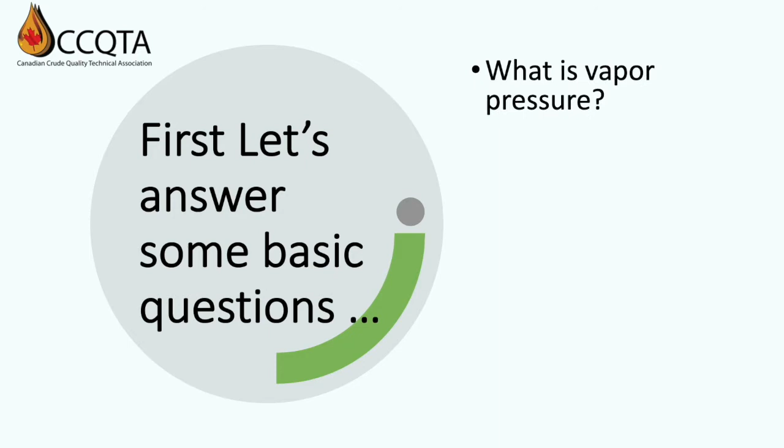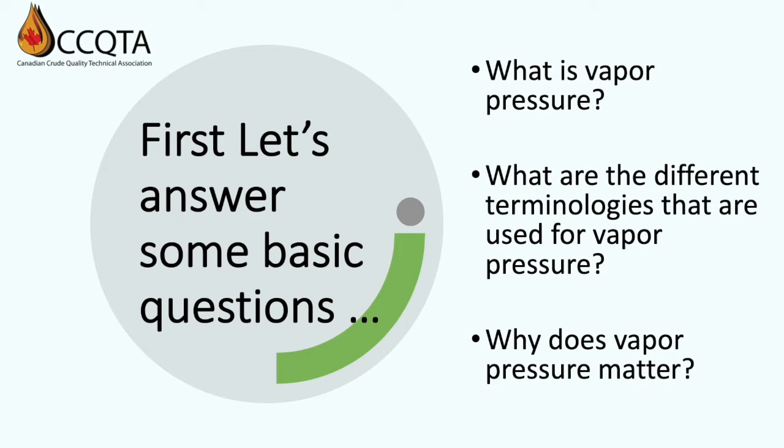First, let's answer some basic questions. What is vapor pressure? What are the terminologies that are used for vapor pressure? And why does vapor pressure matter? Now, some of this may appear a little basic. However, it's important to make sure we're all on the same level before we get too far into this topic. So let's start with what is vapor pressure.

The encyclopedia definition is: vapor pressure is a measure of the tendency of a material to change into the gaseous or vapor state, and it increases with temperature. The temperature at which the vapor pressure at the surface of a liquid becomes equal to the pressure exerted by the surroundings is called the boiling point of the liquid.

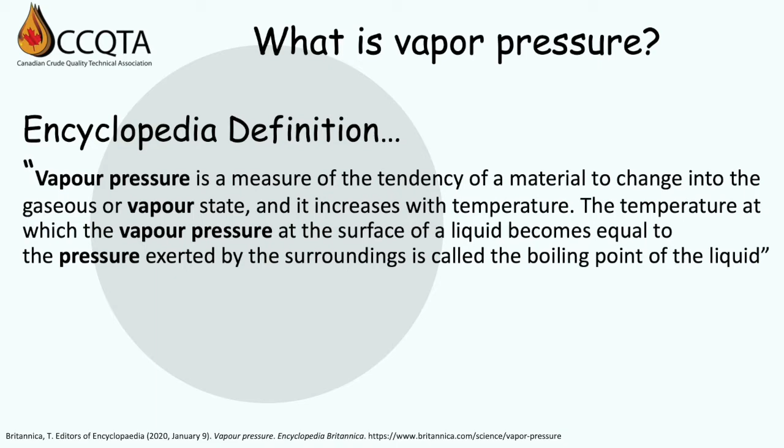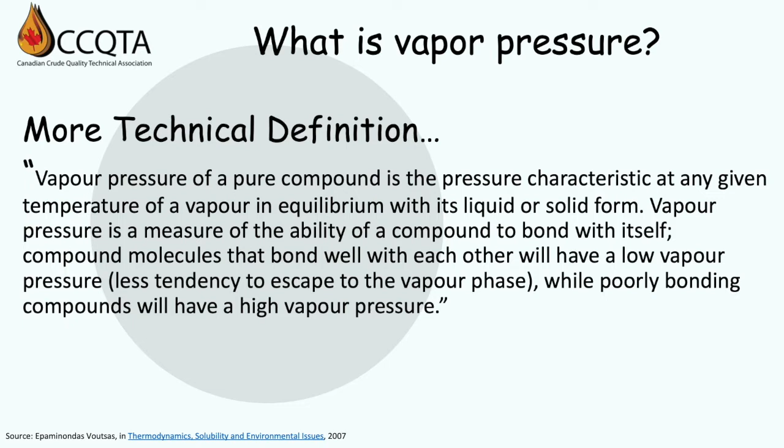Now, to get a little more technical, the vapor pressure of a pure compound is the pressure characteristic at any given temperature of a vapor in equilibrium with its liquid or solid form. Vapor pressure is a measure of the ability of a compound to bond with itself. Compound molecules that tend to bond well with each other have a low vapor pressure, meaning less tendency to escape into the vapor phase, while poorly bonding compounds will have a higher vapor pressure, meaning a greater tendency to escape into the vapor phase.

Now, to get even more technical, from a thermodynamic standpoint, this can be viewed from the well-known Clausius-Clapeyron expression, where delta H is the heat of vaporization. So in explanation, the energy needed to break intermolecular bonds in the pure condensed liquid. Since breaking bonds requires the input of energy, we would expect the vapor pressure of a compound to increase with increasing temperature.

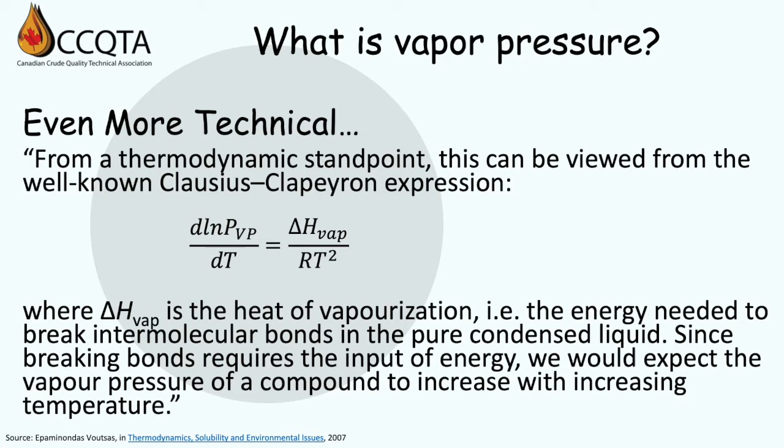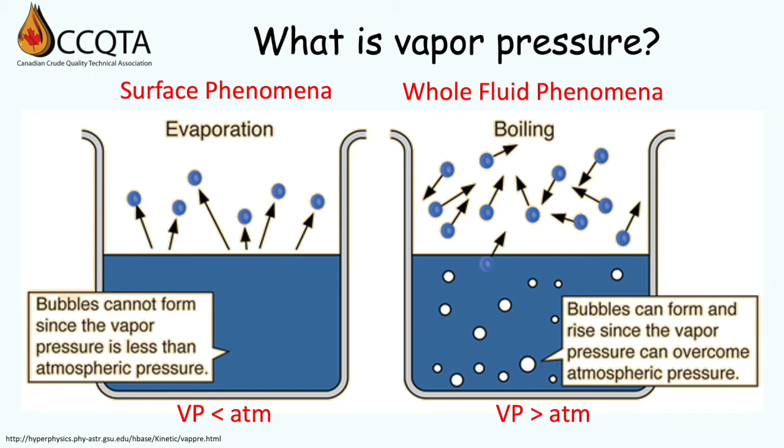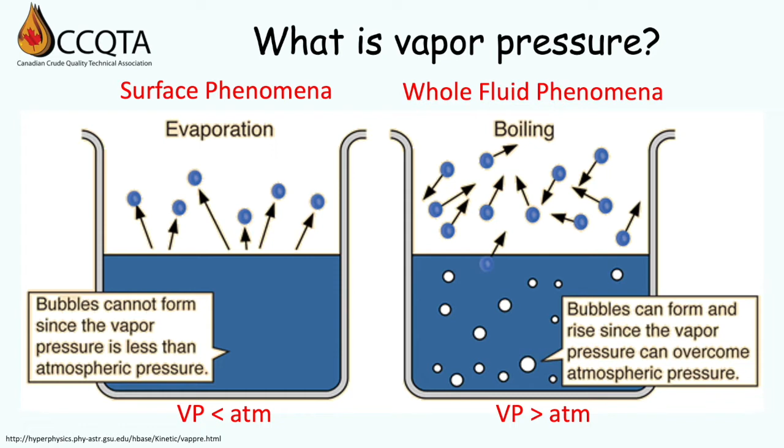So how does vapor pressure relate to evaporation and boiling? An important distinction between evaporation and boiling is that evaporation is a surface phenomenon, while boiling is a whole fluid phenomenon. When the vapor pressure is below atmospheric pressure, evaporation takes place because atmospheric pressure is pushing on the surface, preventing bubbles from forming. When the vapor pressure is above atmospheric pressure, boiling takes place throughout the fluid because bubbles can form. Keep in mind, even ice has a vapor pressure, which is why ice cubes left in the freezer shrink over time.

There is also a difference between an open and closed system. In an open system, the vapor pressure allows molecules from the surface to evaporate and enter the vapor space above the liquid. However, these molecules can escape, so equilibrium cannot be established. Therefore, evaporation continues. On the other hand, in a closed system, such as a sealed tank or cylinder, evaporation also occurs. However, the molecules can't escape, so they reach an equilibrium where an equal number of molecules evaporate as do condense. A floating roof tank would be a hybrid of these two, where it is a closed system. However, there are small losses that occur around seals, fittings, etc.

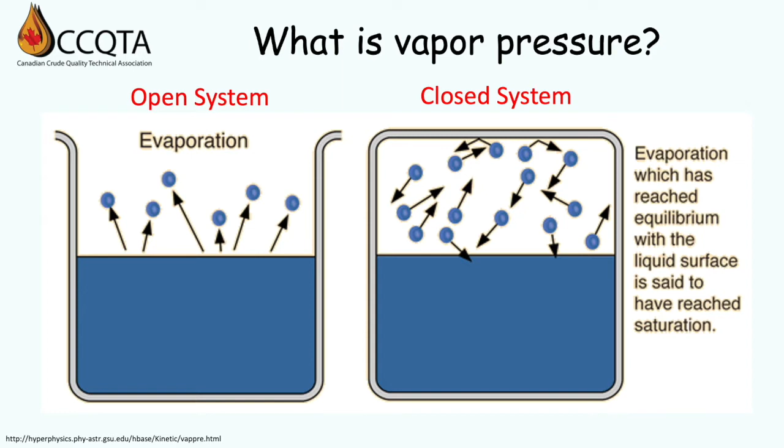How about for a complex mixture like crude oils? Let's look at this in practical terms. Crude oil has hundreds to thousands of individual components with widely varying characteristics. However, only the smallest components have appreciable vapor pressures. This is because the smaller the molecule, the lower the intermolecular forces, so they don't want to hang around together.

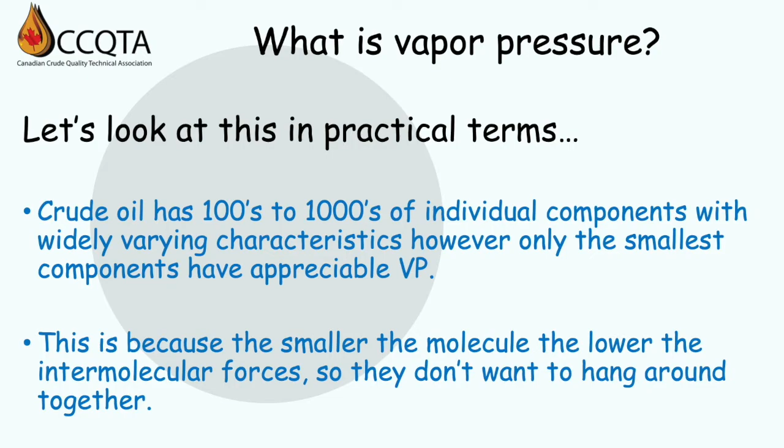Now let's look at the vapor pressure of these components as a function of their size. On the y-axis, we have the molecular volume or size, and on the x-axis, the carbon number from carbon-1 methane through carbon-6 hexane. The size of the bubble represents the vapor pressure contribution of each component. For example, C6 has the largest molecular volume, but the smallest vapor pressure at 40 kPa. Conversely, C1, methane, has the smallest molecular volume, but has the largest vapor pressure at a whopping 35,000 kPa. Let's look at why this is.

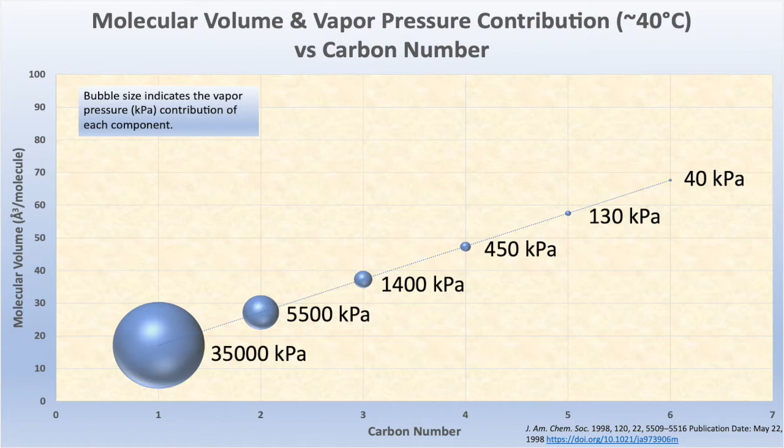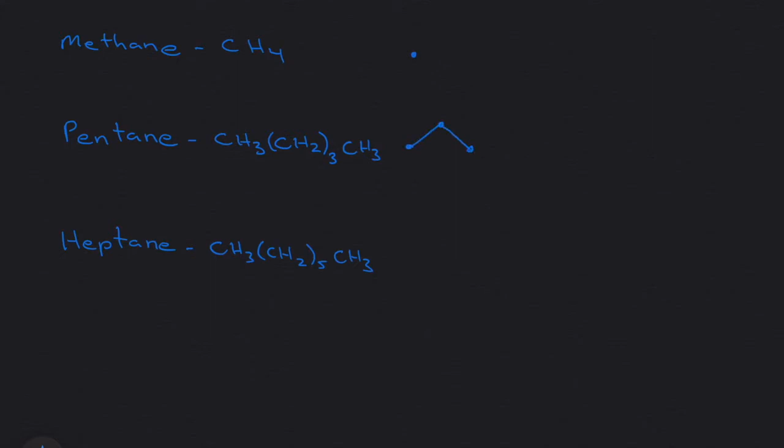Let's look at methane, pentane, and heptane, and how they interact with themselves. These ball and stick diagrams depict the individual carbons and the bonds between them, with hydrogens assumed on each carbon. There are 3 isomers of pentane and 9 isomers of heptane, which are different configurations using the same number of carbons.

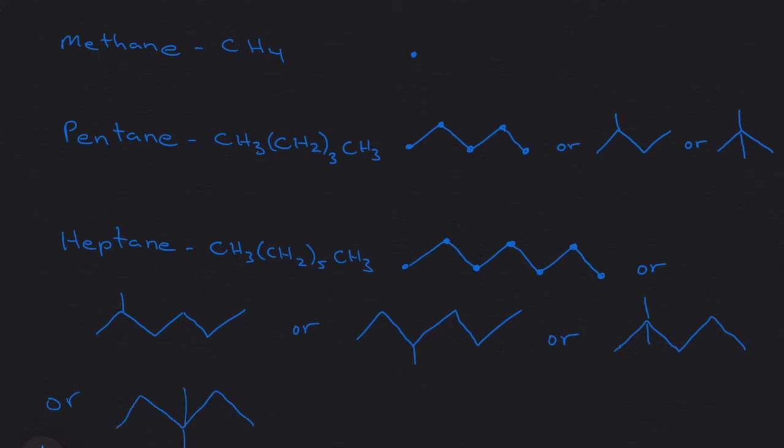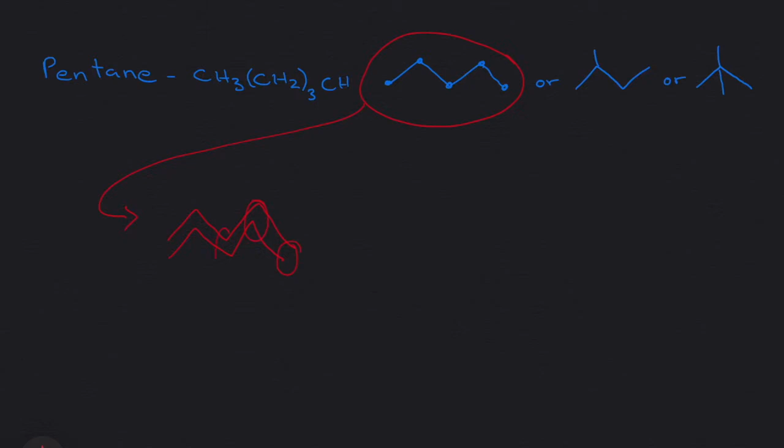Let's compare how pentane isomers react with each other. N-pentane is basically a straight chain. Stacked on top of one another, they can get quite close, allowing their hydrogens to interact, resulting in hydrogen bonding. In this case, they have 5 points of close interaction. If we take isopentane, the methyl group sticking up from carbon 2 restricts how close the other atoms can get to one another, meaning the intermolecular bonding will be far less than that for N-pentane.

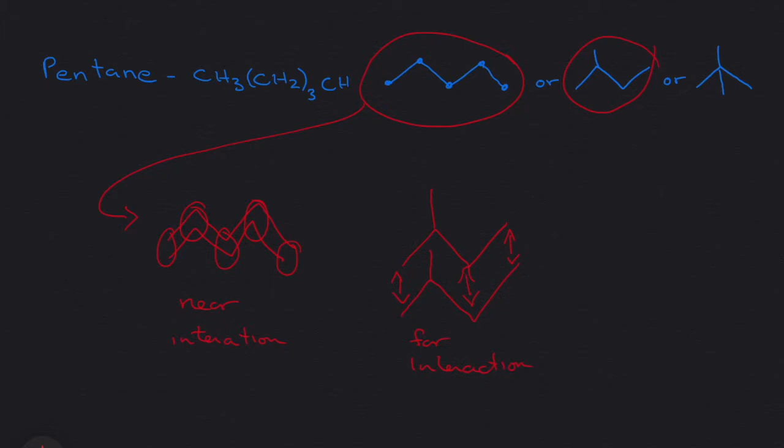Now let's take a look at heptane. We'll only look at two isomers. N-heptane is very similar to N-pentane in that it's a straight chain, and it has up to 7 areas of potential interaction. This branched chain version interacts similar to isopentane, except it has multiple branches, so it can't get close enough geometrically to allow close interaction.

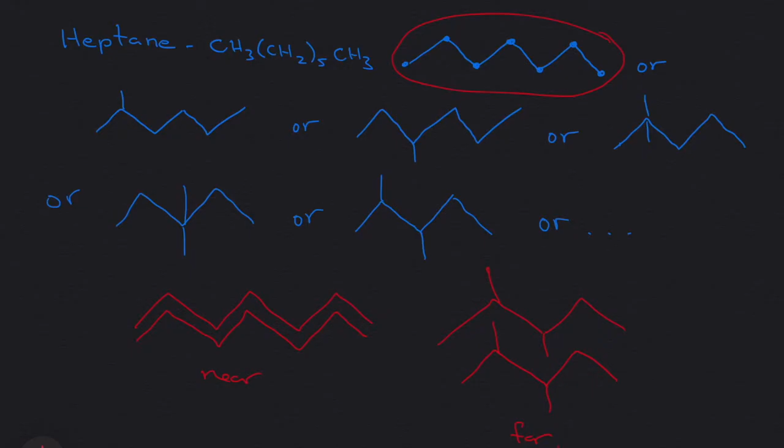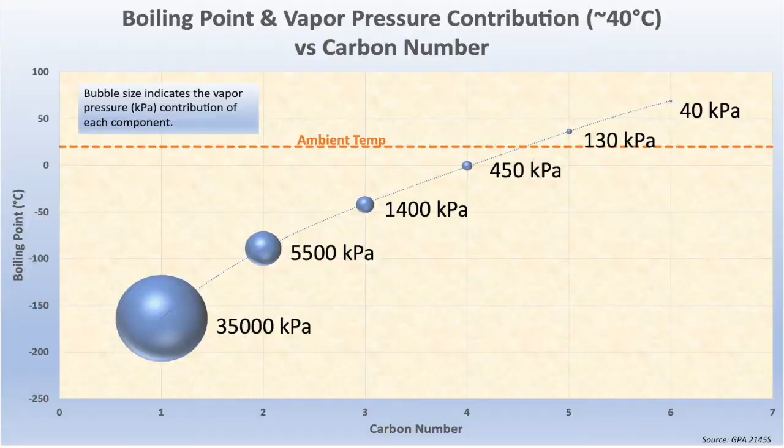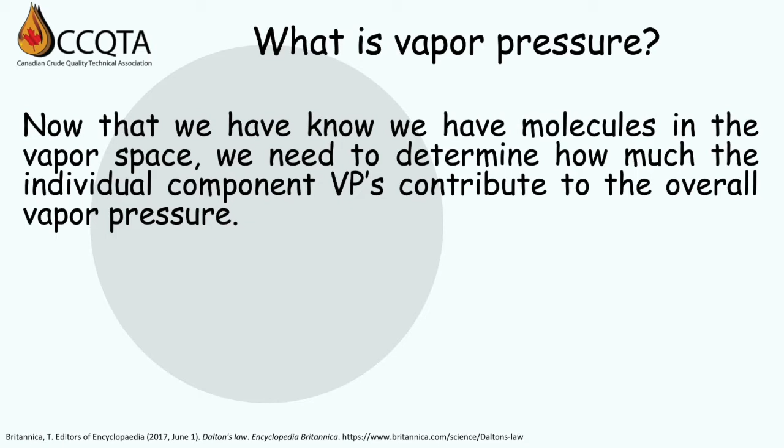Now that we know we have molecules in the vapor space, we need to determine how much the individual component vapor pressures contribute to the overall vapor pressure. In steps Dalton's law of partial pressures, which states the total pressure of a mixture of gases is equal to the sum of the partial pressures of the individual component gases. The partial pressure is the pressure that each gas would exert if it alone occupied the volume of the mixture at the same temperature.

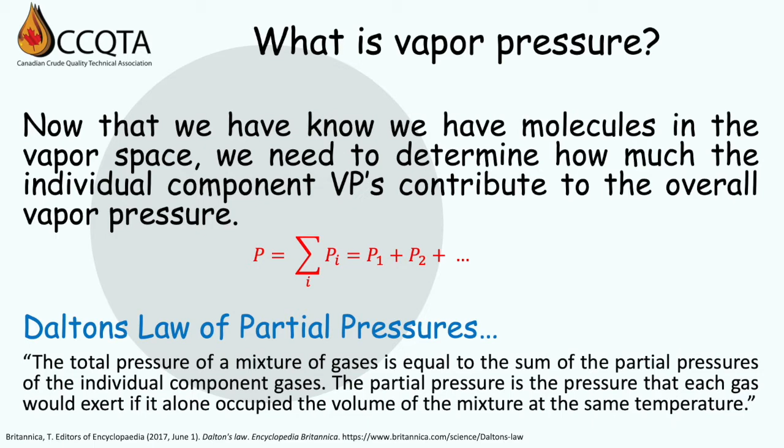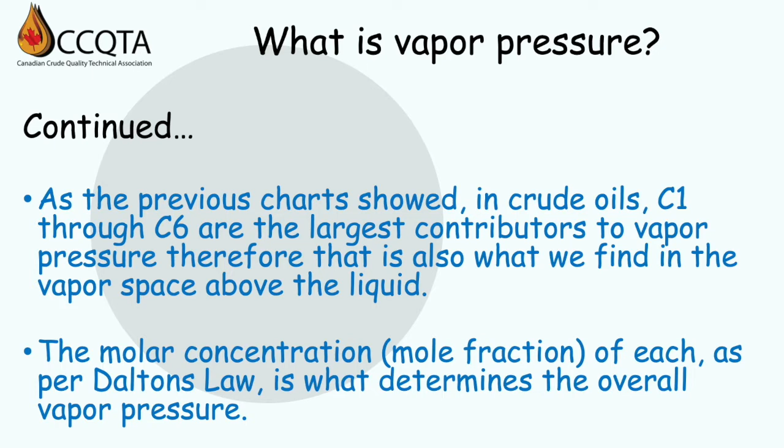As the previous chart showed, in crude oils, C1 through C6 are the largest contributors to vapor pressure. Therefore, this is also what we find in the vapor space above the liquid. The molar concentration or mole fraction of each, as per Dalton's law, is what determines the overall vapor pressure.

Let's look at a real example of a crude oil. On the right, you can see that C1 through C10 make up about 24% of the total mass of the sample. Let's look at the impact of this on the vapor pressure.

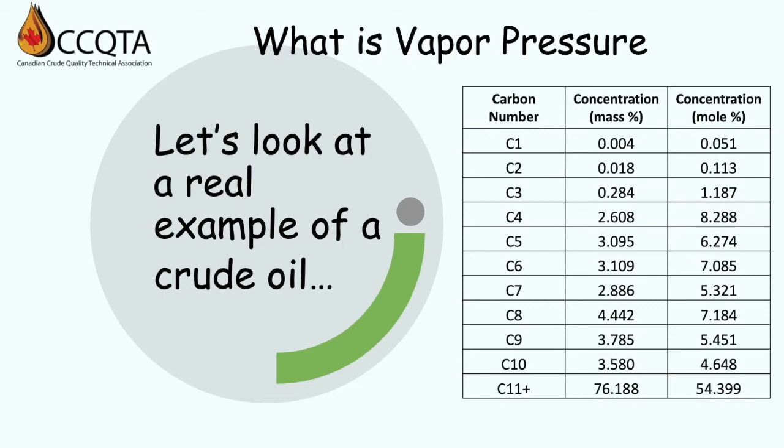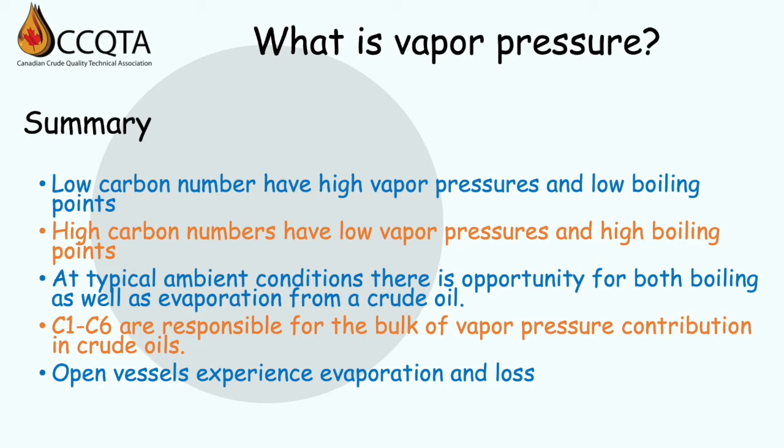Let's summarize what we've learned so far. Low carbon numbers have high vapor pressures and low boiling points. High carbon numbers have low vapor pressures and high boiling points. At typical ambient conditions, there's an opportunity for both boiling as well as evaporation from a crude oil. C1 through C6 are responsible for the bulk of vapor pressure contribution in crude oils. Open vessels experience evaporation and loss, and finally, closed vessels experience no evaporation and loss, except in the case of a floating roof tank, which is a bit of a hybrid, as we've discussed already.

Now let's move on to vapor pressure terminology.

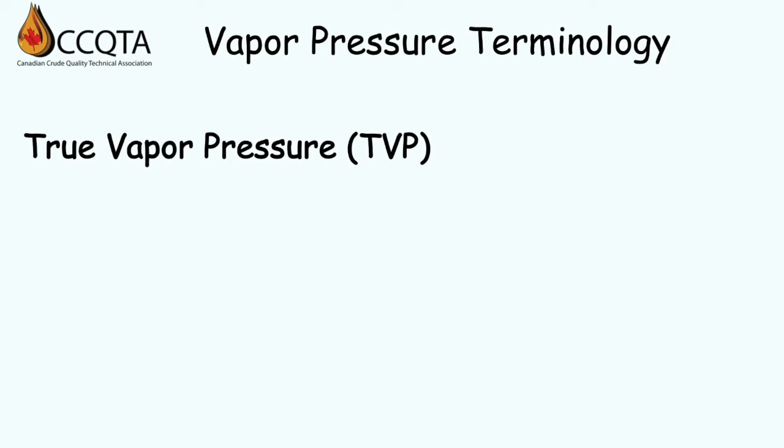The most commonly used terminologies are true vapor pressure (TVP), total vapor pressure (also TVP), and lastly, Reid vapor pressure (RVP). Why are there so many? Let's look at how vapor pressure is defined throughout the industry.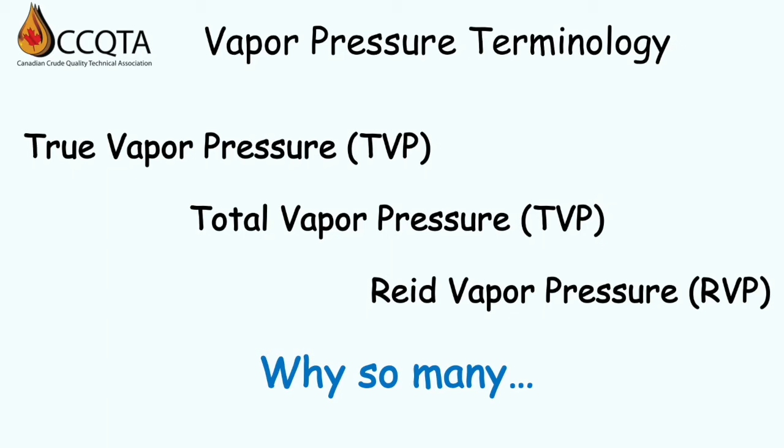ASTM D4175 is the terminology standard for the ASTM D02 Committee on Petroleum Products, Liquid Fuels, and Lubricants, and it attempts to gather and standardize definitions between all the various associated standards. Looking at these four: the first is vapor pressure generically, the pressure exerted by the vapor of a liquid in equilibrium with the liquid. Total vapor pressure is the observed pressure measured in the experiment, that is the sum of the partial pressure of the sample and the partial pressure of the dissolved air.

True vapor pressure here is the pressure at which the fluid is in equilibrium between its liquid and gas state. And the last one, vapor pressure of crude oil, VPCRX, is the pressure exerted in an evacuated chamber at a vapor liquid ratio of X to 1 by conditioned or unconditioned crude oil, which may contain gas, air, or water, or a combination thereof, where X may vary from 4 to 0.02.

Now, while not incorrect, the TVP definition here is open for interpretation because it does not specify the vapor-to-liquid ratio. As we saw in previous definitions, the TVP is where the vapor-liquid ratio is 0 to 1. ASTM D4057 is a sampling practice, so it should be more clear on the definition, so it would be better if they clarified that further.

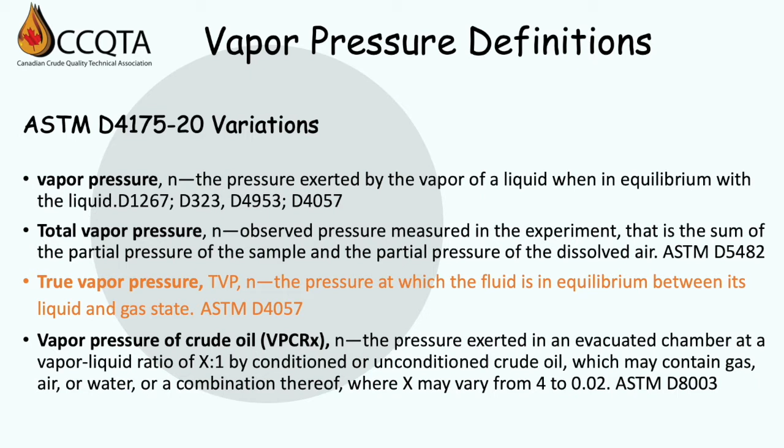The Reid vapor pressure, or RVP, is well known since it was first published back in the 1930s. It states the resultant total pressure reading, corrected for measuring error, of a specific empirical test method, ASTM D323, for measuring the vapor pressure of gasoline and other volatile products. The equilibrium pressure exerted by an air-saturated fluid at a 4 to 1 vapor-liquid ratio at 37.8 degrees Celsius.

Notice the scope of the definition here: gasoline and other volatile products. The standard was intended for finished product and mostly for fuels that may experience vapor lock in carbureted engines. The VL of 4 to 1 was used so that air saturation of a sample stored in an open container would not impact the overall vapor pressure measurement.

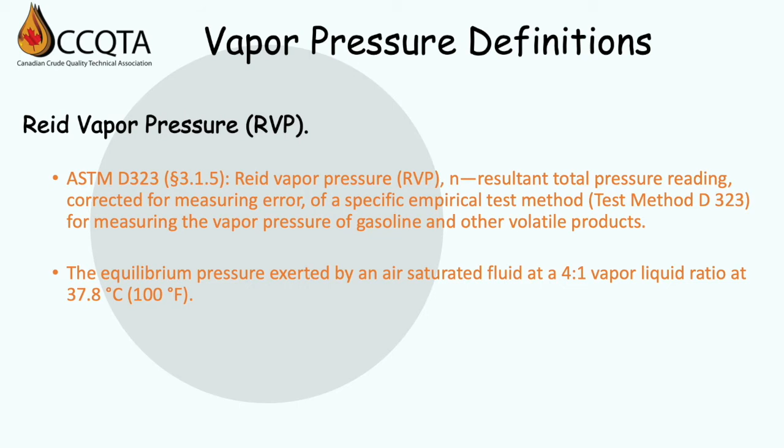Let's look at the true vapor pressure as the US EPA defines it, as per EPA AP-42 Chapter 7. It states true vapor pressure is defined in various ways for different purposes within the industry, such as bubble point for transportation specifications, but for the purposes of these emissions estimating methodologies, it is the sum of the equilibrium partial pressures exerted by the components of a volatile organic liquid using Raoult's law.

True vapor pressure may be determined by ASTM D2879 or D6377 for crude oils with a true vapor pressure greater than 3.6 psia, or obtained from standard reference texts. For certain petroleum liquids, true vapor pressure may be predicted from Reid vapor pressure, which is the absolute vapor pressure of volatile crude oil and volatile non-viscous petroleum liquids, as determined by ASTM D323 or 5191.

Note the use of absolute vapor pressure here, which serves to further confuse the issue. From the text, it sounds like it would be equivalent to true vapor pressure as we've discussed. However, it is actually the same as RVP, which is air saturated at 4 to 1 VL. This definition of RVP is also not consistent with D323 itself.

EPA also indicates that D2879 or D6377 can be used. However, the VL ratio of 2879 is 0.4 to 1, so a 40% ullage, and the statement does not indicate if D6377 also needs to be at a 0.4 to 1 to be equivalent. Also note the point that for certain petroleum liquids, TVP may be predicted from RVP. What petroleum liquids is this referring to? One could potentially assume crude oil since it's mentioned in the description, but it's still a little ambiguous.

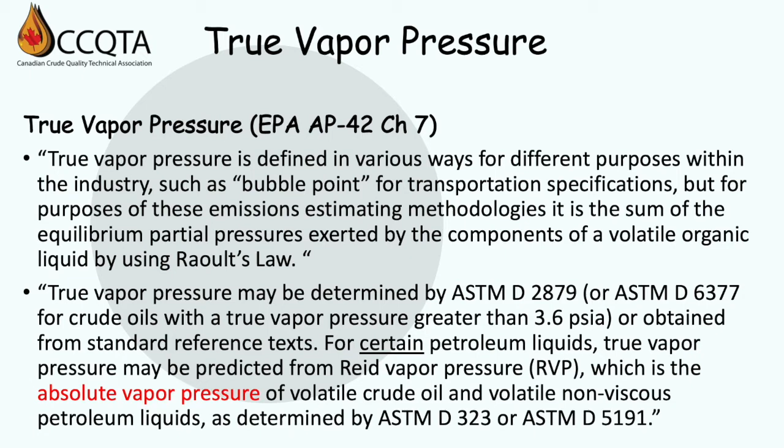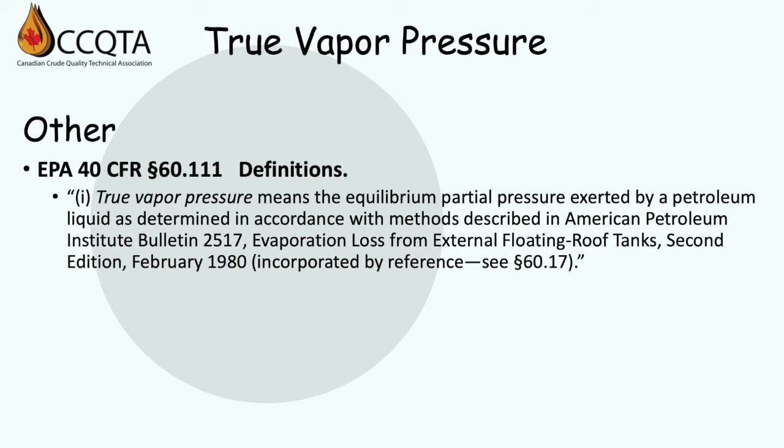Let's look at another EPA definition. This one states, true vapor pressure means the equilibrium partial pressure exerted by a petroleum liquid as determined in accordance with the methods described in API Bulletin 2517, evaporation loss from external floating roof tanks. Here you can see that even EPA uses different definitions within its own documents.

Here's another definition, this one from the International Maritime Organization, the UN specialized agency responsible for the safety and security of shipping and prevention of marine and atmospheric pollution by ships. It states the true vapor pressure, or bubble point vapor pressure, is the equilibrium vapor pressure of a mixture when the gas-liquid ratio is effectively zero. It is the highest vapor pressure possible at any specified temperature.

As the temperature of the petroleum mixture increases, its TVP exceeds atmospheric pressure, where the liquid commences to boil. This is probably the best definition of true vapor pressure, with the least ambiguity. It specifically indicates the VL ratio it's based on and is consistent with the theory of vapor pressure. A floating roof tank, where the roof is floating directly on the oil, would meet this TVP criteria.

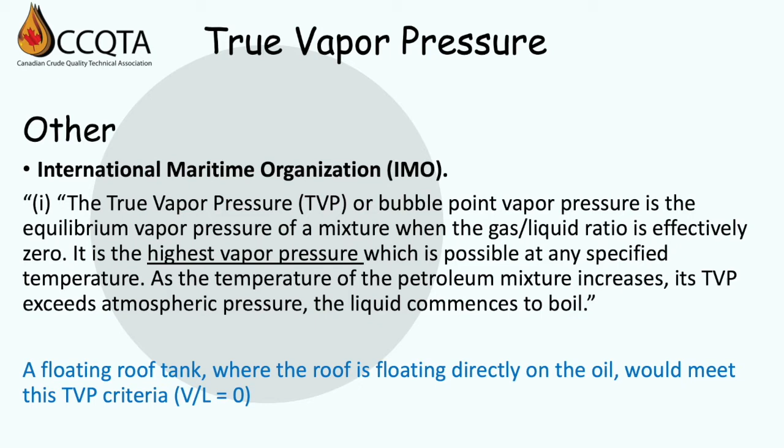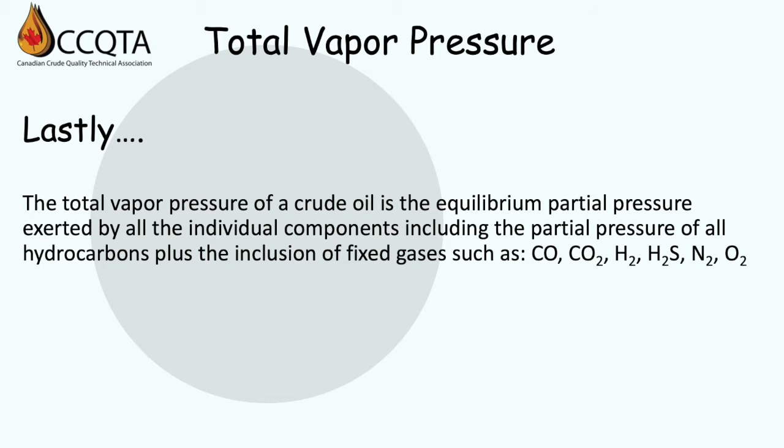Lastly, total vapor pressure. The only difference here is that the total vapor pressure of a crude oil is the equilibrium partial pressure exerted by all the individual components, including the partial pressures of all hydrocarbons, plus the inclusion of the fixed gases such as carbon monoxide, carbon dioxide, hydrogen, hydrogen sulfide, nitrogen, and oxygen. Effectively, this is what is measured using the D323 or D6377 test method, since it's possible for fixed gases to be present in a crude oil.

Well, now that we've blown your mind with all this terminology, let's try to summarize this. To summarize in practical terms, true vapor pressure is equal to the vapor pressure at a VL of 0 to 1, which is also the bubble point.

VPCR, based on D6377, has a condition that the VL ratio is 4 to 1. Therefore, TVP does not equal VPCR4, and subsequently TVP will be greater than VPCR4. RVP, based on D323, is also measured at a VL of 4 to 1. Therefore, RVP also does not equal TVP, and TVP will be greater than RVP.

Now, based on D6377 section 1.x1.2, multiplying VPCR by 0.834 for pressurized samples or by 0.915 for non-pressurized samples, the RVP can be predicted. This indicates that VPCR4 should also be greater than RVP. This is true in most cases. However, we will get into the details of why they can be the same in another episode.

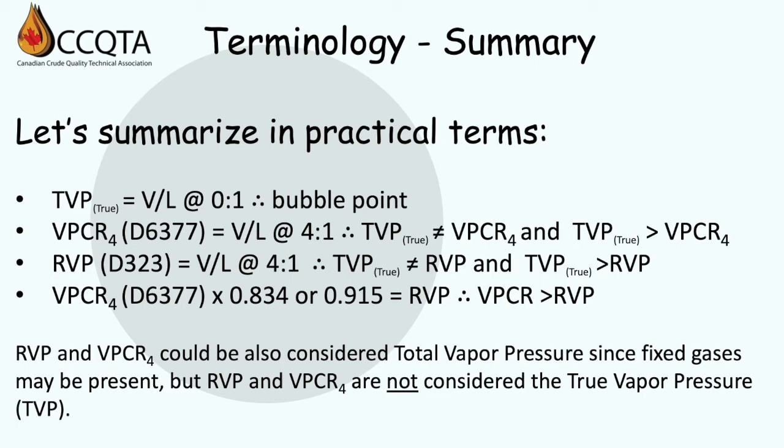Let's look at one last chart showing how the various terms would be interpreted. This is an example of a phase diagram of a generic crude oil. If you're not familiar with a phase diagram, the upper line equals the bubble point, while the lower line equals the dew point, all as a function of pressure and temperature. The center of the diagram is the two-phase region depicting the various VL ratios.

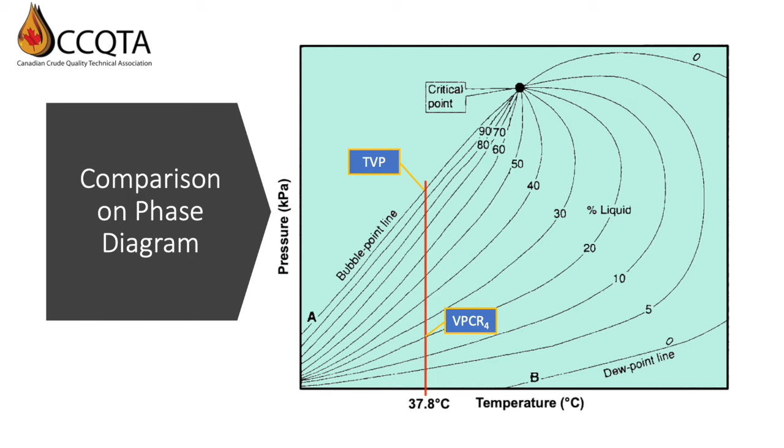This illustrates the pressure where the TVP appears versus where the VPCR4 appears. That explains why there's quite a significant difference between the two, which is why terminology matters when discussing vapor pressure. So you can see on the chart there's a significant difference between one pressure and the other.

Which term should be used? When referring to ASTM D6377 results, the proper term is VPCRX TM, where X equals the VL ratio and TM equals the temperature, since either could be different. A VL of 4 to 1 at 37.8 degrees C or 100 degrees Fahrenheit is the most common, so reporting as VPCR4 37.8 degrees C is the appropriate term.

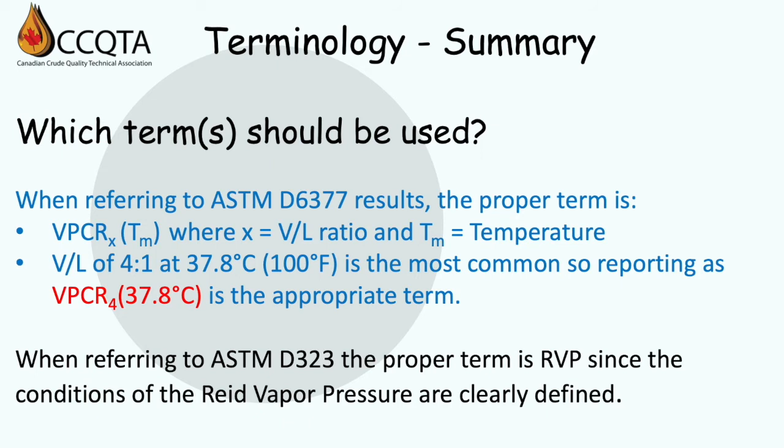When referring to ASTM D323, the proper term is RVP, since the conditions of the reid vapor pressure are clearly defined. An important takeaway is that terminology matters because there are implications behind names and acronyms that can easily be confused. Referring to D6377 as TVP is not appropriate.

On to the last question we posed: why does vapor pressure matter? For one, safety. Another, operational concerns and issues. And lastly, the environment. All three are impacted by vapor pressure.

Let's start with safety. Both employees and the public are at risk of exposure to inhalation risk as an asphyxiant, overpressure conditions on rail cars or tank trucks leading to venting, floating roof tank instability, flammability and/or explosion risk during accidental releases, such as derailment, road accidents, spills, venting, etc.

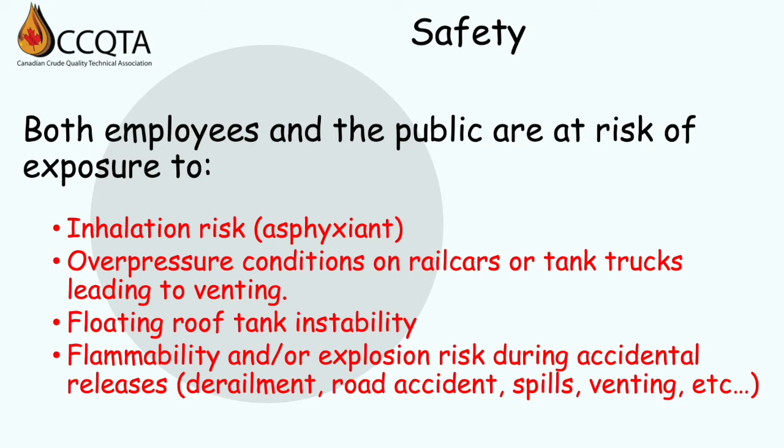Now let's take a little bit closer look at these, starting with flammability. Ignitability and flammability are related to the ratio of fuel vapor to air. When the ratio of hydrocarbons to air is in the appropriate range, the air-fuel mixture will ignite in the presence of an ignition source, such as a spark or static release. There is both a lower and upper explosive limit. The following plot helps to visualize the explosive range of each of the most volatile hydrocarbons we've been looking at.

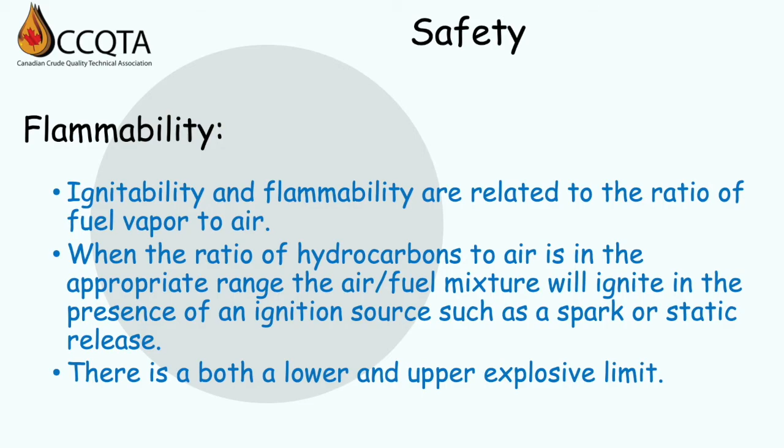Let's look at some incidents related to safety. The first is a refinery reporting receiving rail cars at 172 kPa, so about 25 psi at offload. The observation they made was like oil was boiling over the top of the car like a soda can. Now imagine the atmosphere near that rail car as volatile material is boiling out, and the likelihood that an explosive mixture in the air was present. At that point, a simple static discharge could have resulted in an explosion.

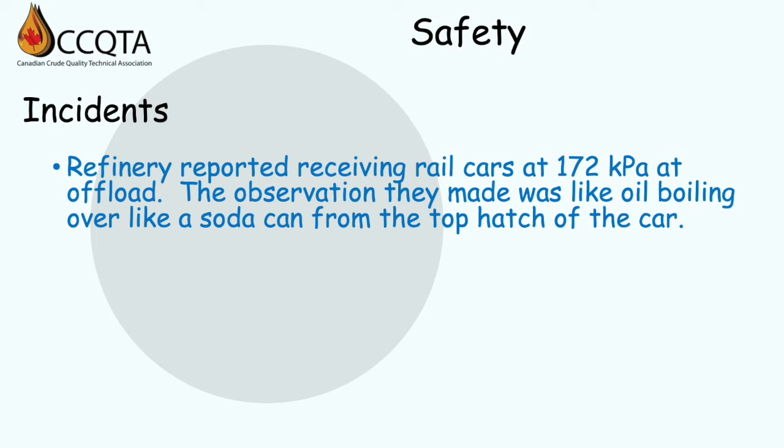The next type is floating roof tank failures. There have been several reports where high vapor pressure crudes have resulted in flipping the roof, where the internal vapor pressure exceeded the atmospheric pressure plus the weight of the roof and lifted the roof off some or all of the liquid, resulting in destabilization. Keep in mind, when the floating roof tank flips, all of the vapor that's sitting in that space is released into the air, forming a potential explosive mixture above and near the tank.

Now, another example is a truck driver who's been hauling crude oil and is bringing back an empty trailer containing a small amount of residual crude. If that was high vapor pressure crude, it's possible that when the tank hatches open, the atmosphere inside the tank is full of hydrocarbon. Well, the gas mixture inside the tank is likely too rich to be explosive. As soon as the hatch is opened, the gas from inside begins to interact with the air, potentially forming an explosive mixture above the hatch. There is also a danger that the hydrocarbon gases inside the tank displace the air, causing an asphyxiation hazard to any nearby workers.

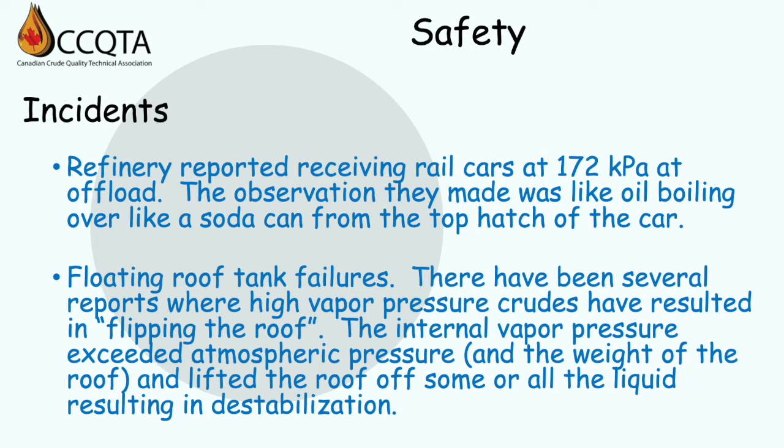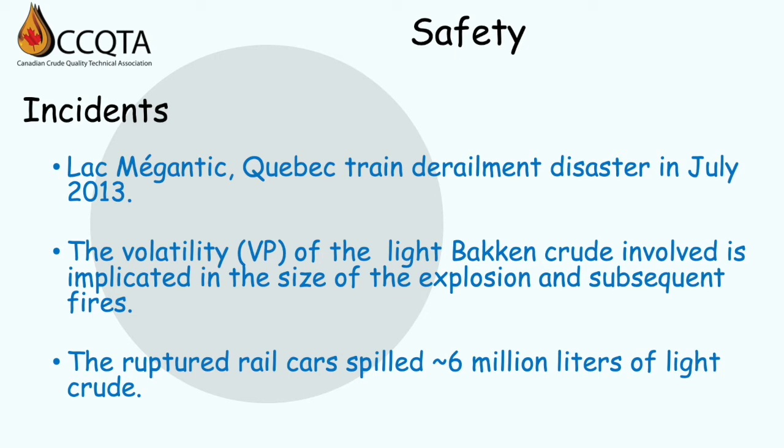The last example of incidents related to safety is the Lac-Mégantic, Quebec train derailment disaster in July 2013. In this case, the volatility of the light Bakken crude oil involved is implicated in the size of the explosion and the subsequent fires. Overall, the ruptured railcar spilled 6 million liters of light crude, as well as killed 47 people, plus injured countless others.

Now let's look at operations. There are also operational considerations to vapor pressure. Pipeline systems have specifications for which they were designed, and transporting high vapor pressure product may exceed those specifications. Now, pipeline tariffs are also unique to the operator and may include parameters such as vapor pressure.

Then we have system volume losses. Earlier we talked about breakout tankage on some lines while others are tight line. In the case of systems with breakout tankage, losses compound with each tank the product enters depending on the tank configuration and the time in tankage before moving on. So as the product moves further down the line, more and more losses occur as light ends are lost.

So volume contracts. Lastly, pumps and meters in a transmission pipeline system are intended for single-phase product, and if a high vapor pressure product generates a vapor phase through pressure changes or temperature changes, then cavitation may lead to pump damage, and lastly, meters may not report correctly.

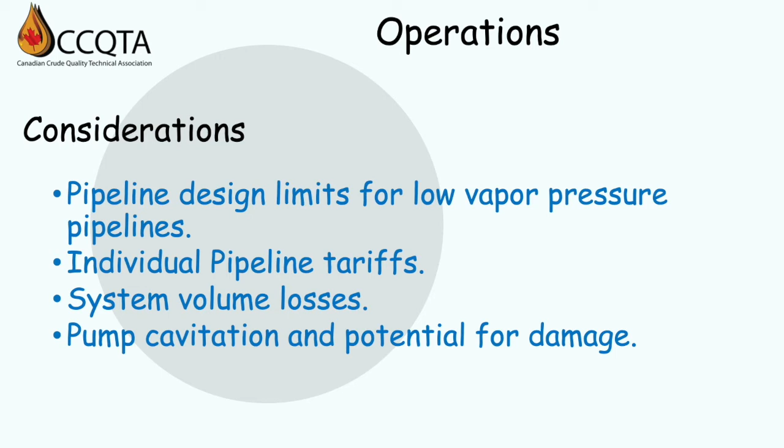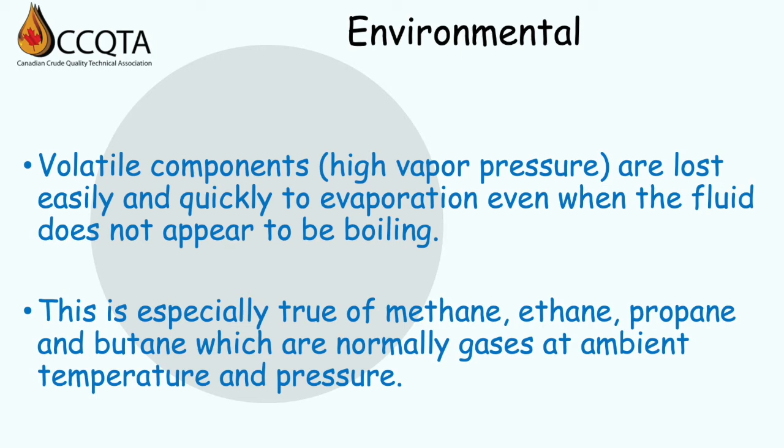Let's look at the environmental considerations. Volatile components or high vapor pressure are lost easily and quickly to evaporation even when the fluid does not appear to be boiling. This is especially true of methane, ethane, propane, and butane, which are normally gases at ambient temperature. Crude oil kept in storage tanks will evaporate or weather depending on the ambient temperature and the composition of the crude oil. This evaporation results in potential emissions, and this is where environmental concerns arise in relation to vapor pressure.

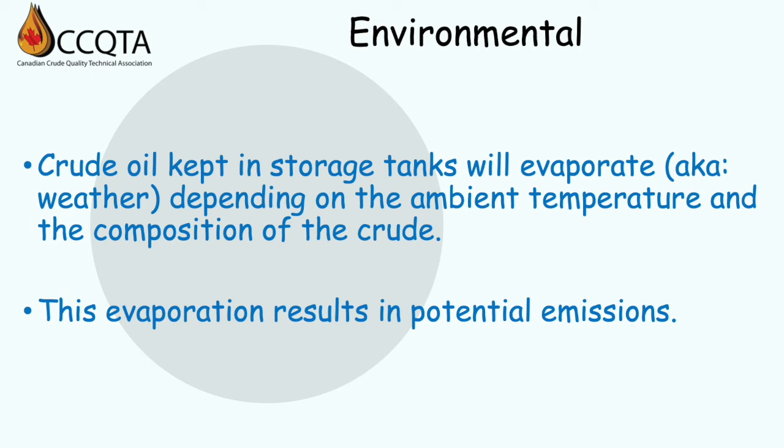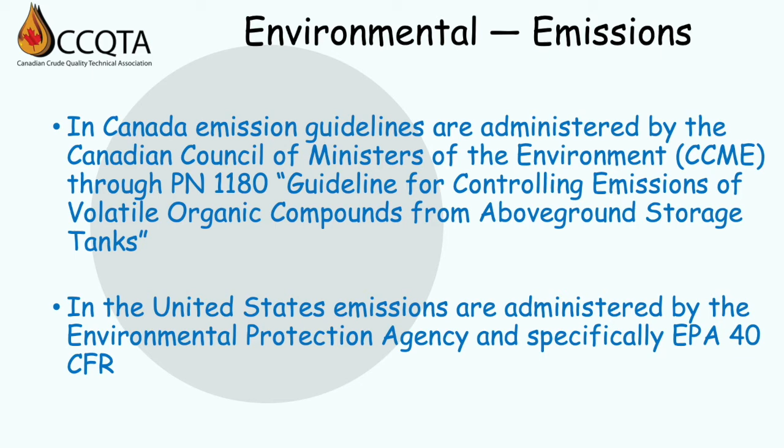In Canada, emissions guidelines are administered by the Canadian Council of Ministers of the Environment, or the CCME, through PN 1180, the guideline for controlling emissions of volatile organic compounds from above-ground storage tanks. In the United States, emissions are administered by the Environmental Protection Agency and specifically EPA 40 CFR.

CCME PN 1180 states all tanks with capacities greater than 75 cubic meters storing volatile organic liquids with a vapor pressure greater than or equal to 76 kPa shall have a vapor control system. A vapor control system means that it shall recover the vapors, destroy the vapors by thermal oxidation, burning, or other means, or recycle the vapors for other uses in the facility. The system shall prevent vapors from being emitted into the atmosphere with an efficiency of at least 95 weight%.

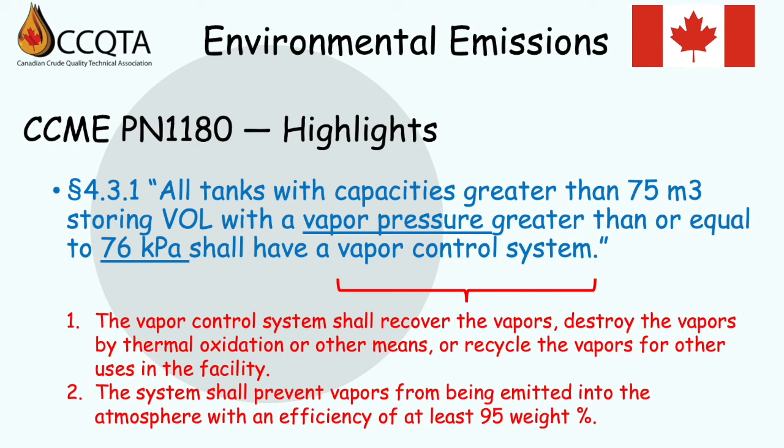Let's look at the highlights of the US EPA 40 CFR. I'm going to paraphrase a bit here.

If the TVP is greater than 10.3 kPa but less than 76.5 kPa, then the storage vessel shall be equipped with a floating roof, a vapor recovery system, or their equivalents. If the TVP is greater than 76.5 kPa, then the storage vessel shall be equipped with a vapor recovery system or its equivalent.

Note that the EPA uses true vapor pressure in their standards, so it's important to understand how they define TVP. In this case, D6377 is acceptable, however they don't specify the VL, so they have left it open for interpretation. Since they also indicate RVP can be used, a VL of 4:1 could be interpreted. However, they also indicate that RVP should be used to predict the TVP using the API nomograph. In this case, the VPCR4 could be used in place of the RVP and the TVP calculated from there.

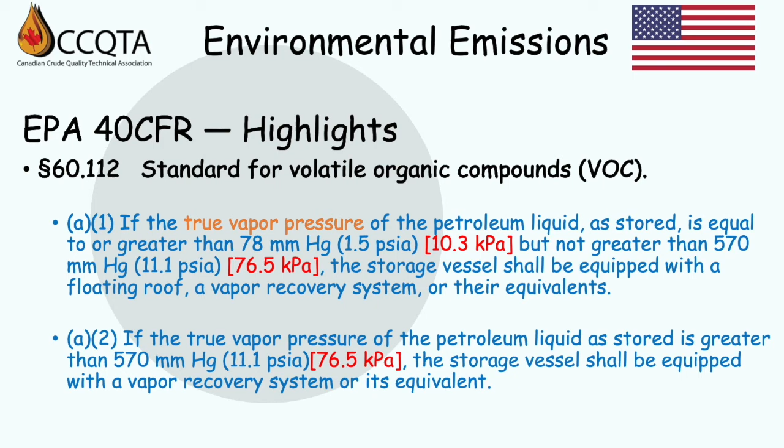Let's see what that looks like in terms of measurement using the TVP to RVP conversion using the API nomograph. This is a version of the API nomograph that was developed in the 1950s and has been used for tank emission estimates ever since. It uses the Reid vapor pressure at a given temperature and converts it to TVP as the EPA defines it. This illustration shows a few examples of how the nomograph is used at various RVP values, all at 100 degrees Fahrenheit or 37.8 degrees Celsius.

So here's the first one: 75.8 kPa converts to a TVP of 107 kPa. Next we have 82.7 kPa converts to 121 kPa, so we're well above atmospheric pressure. 89.6 kPa converts to 138. And finally, we have 100 kPa, just under atmospheric pressure for an RVP, which converts to a TVP of just under 160 kPa. Now, how would this be impacted by RVP measurement when it comes to emissions calculations?

What if the VPCR4 was used to predict the RVP first and then used? Then you would be using a correlation on top of a correlation, which seems like a bad idea.

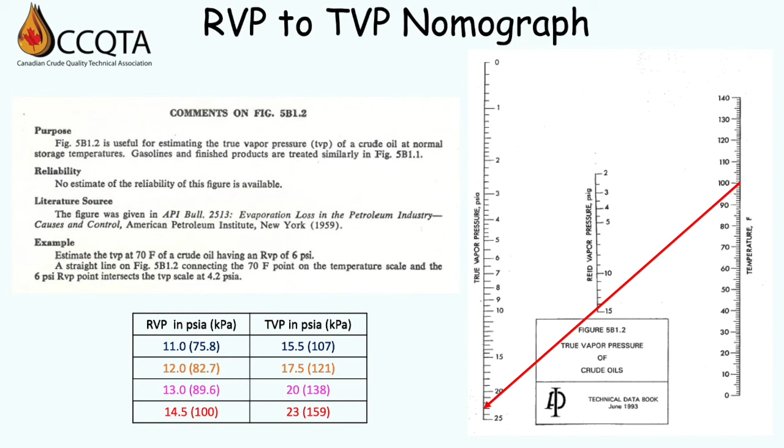Now consider the EPA also allows the use of D6377, however with VL unspecified, to be used directly as a TVP. How would those compare? What is the impact of other factors on measurements? We'll look at those considerations in a subsequent episode.

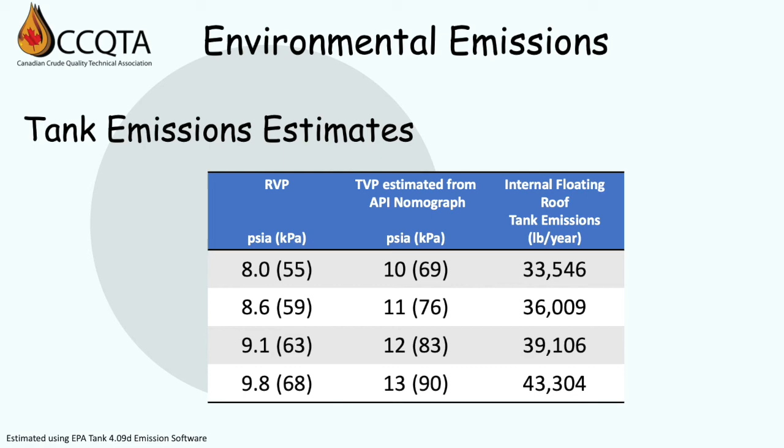So let's summarize. Vapor pressure is simply a proxy for the concentration of small hydrocarbons that are emitted, which is what is actually of interest for emissions, toxicity, flammability, etc.

The measurement method matters since different test methods give different results. For example, they have different VL ratios and temperatures. Emissions calculations are impacted by the measurement method, and really the best measurement method for emission calculations would be to use the actual composition of the material.

The EPA's primary definition of vapor pressure uses the composition and Raoult's law and is based on the true vapor pressure of the individual components in relation to the mole fraction of the mixture. So ideally, a compositional measurement would be best.

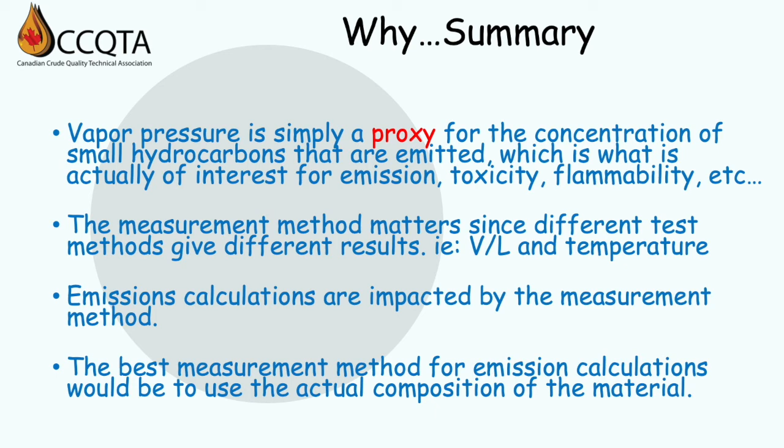Let's leave the technical aside for a moment and talk about how the CCQTA got involved in this. In March 2012, TransCanada did a presentation to the CCQTA titled Redevelopment of the TVP-RVP Correlation for Western Canadian Crudes.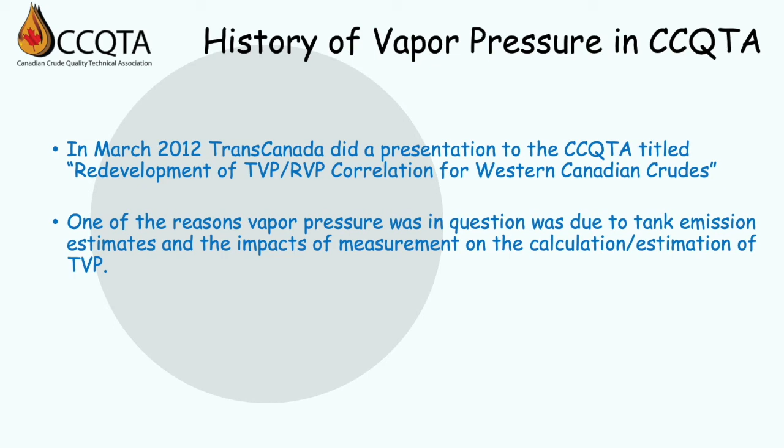One of the reasons vapor pressure was in question was due to tank emission estimates and the impacts of measurement on the calculation and estimation of TVP. The presentation highlighted the various methods used for vapor pressure measurement—D323, D323M, and D6377—and that they produce different results for the same crude.

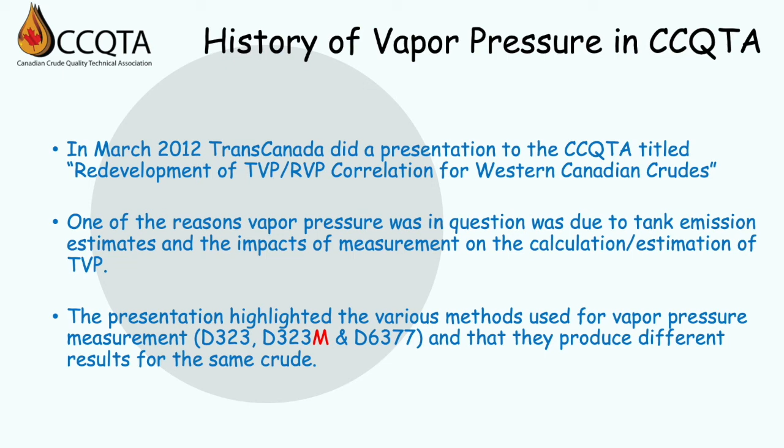The presentation also questioned the applicability of the API nomograph to current crudes versus the crudes from which it was derived back in 1959. This was also not the first time these issues were brought up. Bob Falkiner, who was with Imperial Oil at the time, brought this issue to the CCQTA's attention way back in November of 2000, citing similar concerns around both the test method and the use of the API nomograph. At the time, there was not sufficient interest within the CCQTA to initiate a project, so the topic sat dormant until TransCanada brought the issues back up again in 2012.

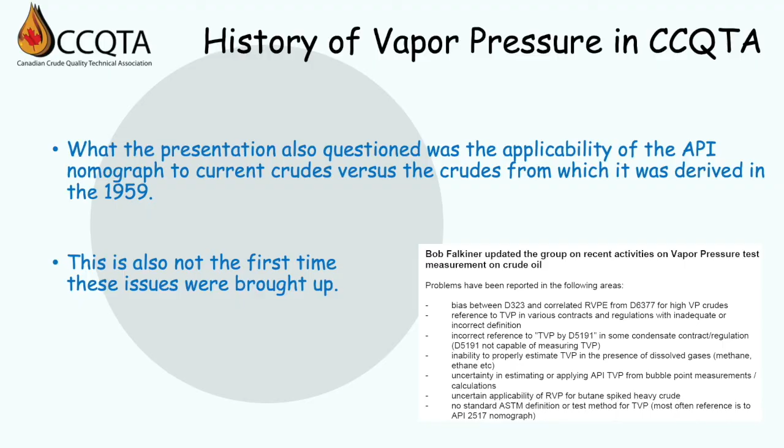This is a condensed timeline of events that took place over the course of the CCQTA TVP-RVP project. However, I'm only highlighting the first few milestones so as not to give away all the details to come.

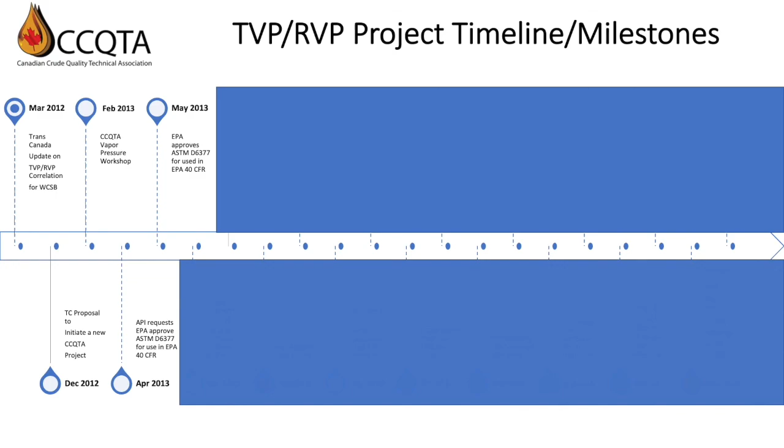Where did the project progress from here? The original project objective was focused towards a redevelopment of the correlation between the crude RVP and TVP, which is currently described by the equation and nomograph published within the API MPMS Chapter 19.2. The accuracy of this correlation for current market crudes has been viewed with increased scrutiny due to the view that the nomograph and related equations were thought to be originally developed on weathered, dead crude oils with little to no documented data on how the tests were conducted and the correlations formulated.

Furthermore, due to the sample collection and air saturation steps dictated within the D323 RVP method, it is believed that this testing procedure is highly prone to error through light-end loss for blended and recent shale or tight crudes on the market today, or live crudes.

The initial project scope was very broad and did not have a very specific direction. It was to gain an industry and regulatory consensus toward an accepted definition for crude oil true vapor pressure. At this point, TransCanada stepped in and committed significant effort and funding to begin to narrow the scope. Their initial work focused on comparing the various existing sampling and testing methods and presented those results to the CCQTA.

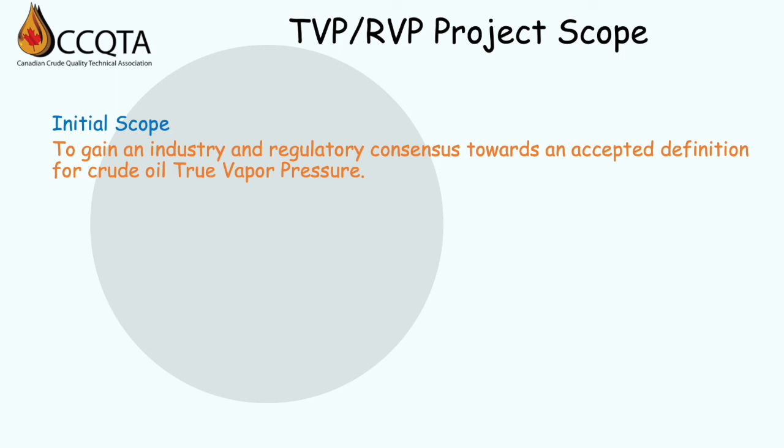That led to the revision of the scope. The revised scope was to develop an accepted method or methods for direct determination of true vapor pressure for transport quality crude oil over a range of temperatures. Also, no further attempts were going to be made towards correlating RVP to TVP, as well as no more attempts towards justifying the validity of the current API Chapter 19.2 nomographs.

Now, with all of that, I think we're going to leave it there for this episode.

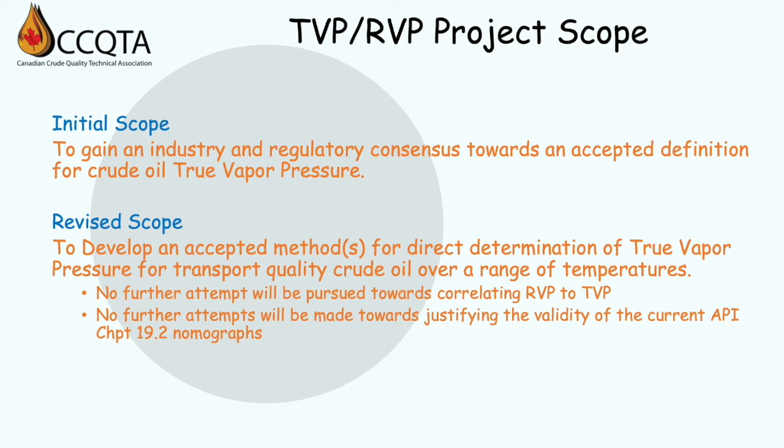Coming soon, Episode 2. Episode 2 will do a deep dive into measurement and specifically into two areas: sampling methods and testing methods.